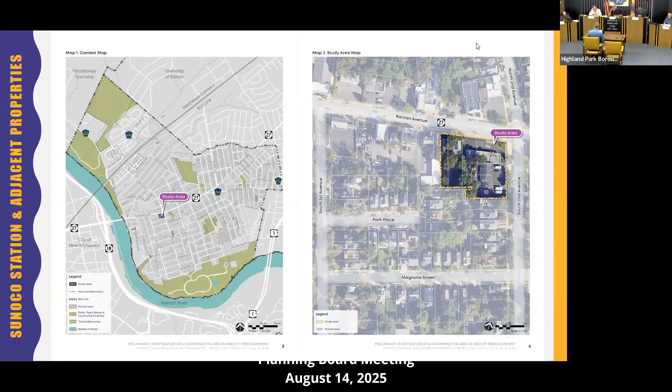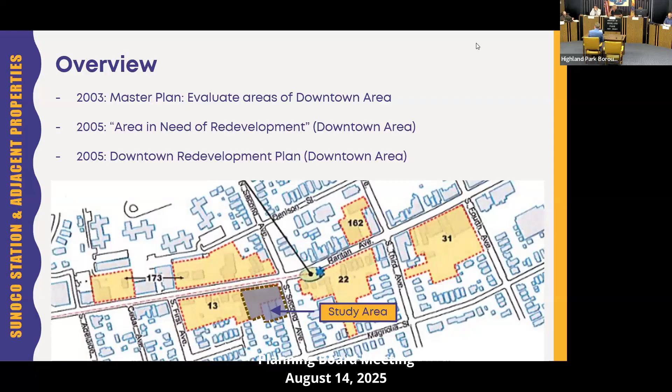Beginning in 2009, there was a mixed-use project contemplated for those two residential structures at 130 and 134 Raritan Avenue. It received approval from this board, but they never pursued the project. Beginning in 2012, there was an application for a 7-Eleven that, after about 10 meetings, was eventually denied. My colleague Jim Constantine represented the objectors, and that's sort of what brought us here to this community.

In 2017, a larger mixed-use building was considered for the same properties - going back to 130, 134 Raritan for the 7-Eleven and the Sunoco station - along with the concept of off-site parking. The reason was we shouldn't rely on Park Place since residential homes front that line, and we didn't want all that traffic going through. So the idea centered on tract D.

It has some centralized parking, but there are ways other tracks could have their own parking. As you know, the past few years, tract A and tract C have been proceeding in their own direction, while tract B has not, for several reasons. That concept of a larger mixed-use building on what we're calling tract B was considered.

After we did the area study for the gun and boat, a year later we did the redevelopment plan for tracts A through D, centered on the concept of centralized parking, perhaps a plaza on North Third, which became South Third after public comment. Tract B was folded into the application because they already had a developer ready to go, whereas everything else is more or less borough-owned and we're trying to get RFPs and get interest. We'd like to get downtown moving.

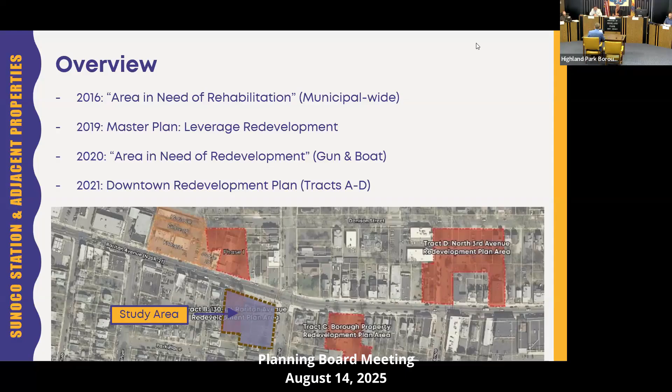So overall: there have been multiple applications, at least 3, for several properties within this study, but they've never been pursued or even approved. All these properties have had extended vacancies over the years, which I'll describe later. There's been progress at tracts A and C, but tract B hasn't been able to figure out the off-site parking. We're not going to let them proceed, by virtue of a redevelopment agreement, until they figure that out. But it's been years.

And I think the community, including this board, members of council, members of the public, ourselves included, asked, there's been a lack of progress in Sunoco. Why not focus on Sunoco? What's the deal with that?

So we hear you. Mayor and council authorized planning board to conduct this study, and as required by the local redevelopment housing law, in that resolution to authorize the study, you have to declare whether or not you may use eminent domain. Since 2013, the state requires that when you do your resolution, if you're not going to use eminent domain, you call it non-condemnation area need redevelopment. If you may use it, you have to say up front, you may use it. We're going to call it condemnation area need redevelopment. That does not mean the borough is required to or has to. It's just that they may.

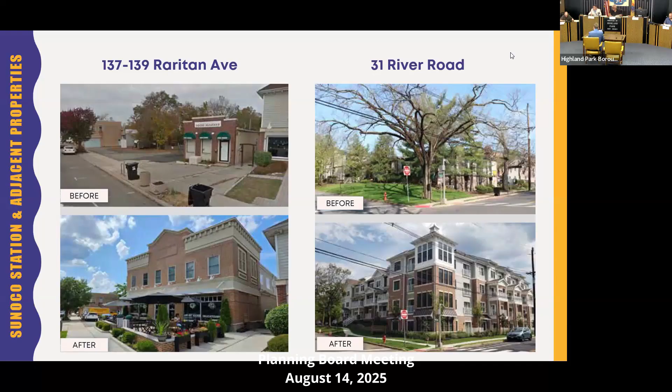And of course, you could designate a specific redeveloper to do a project. It could just be the landowner, and define their obligations, which could include contributions and community benefits. Redevelopment has obviously been successfully used throughout the state, including in Highland Park. These are just two examples I use often, and I think they're very well done. I'm proud that ever since 2016 we came in, we're seeing these happen, and it's slowly but surely coming along and really coming into place.

The statute requires a very specific procedural sequence, and we're just in the beginning of that step, even though there's been other planning related to Tract B, the 2005 plan, and so on. But what we really are is in the middle of that effort, where we prepare the report, hold a public meeting, you're supposed to hear what I have to say in terms of why I think the property does or does not meet the criteria for redevelopment. You hear comments from the public, any objectors, and so on. Your role is to decide, whether you agree or disagree with the report, whether the property does or does not meet the area of redevelopment, and then make recommendations by resolution to the governing body.

In terms of the redevelopment statute, there are 8 criteria. Just briefly, A is about substandard living conditions or working conditions. B is abandoned properties for at least 2 years, recently amended a few years ago to clarify 2 consecutive years. C is public or unimproved vacant land for 10 years or more. D is faulty arrangement of design. E is ownership and title issues, not just that there's inefficiency or not fully productive, but as a result of ownership and title issues.

F is really about 5 years of damage from fire and natural disasters. G is urban enterprise zones, which does not apply to this park, and smart growth consistency.

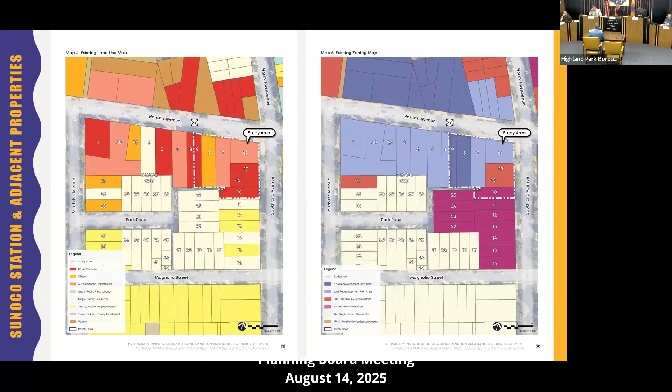On the right side, you'll see that the study area is subject to four different zoning designations, two of which are redevelopment plans. So it's a mixed bag in terms of land use as well as zoning, which is not ideal for redeveloping because you have to reconcile all that.

So now the fun part. This is the actual evaluation as to whether or not I believe the four properties meet the criteria. You'll see at the end of the report that it's my opinion that all four do meet at least one of the criteria. So I'm going to go through a high level of why I think each one of them are.

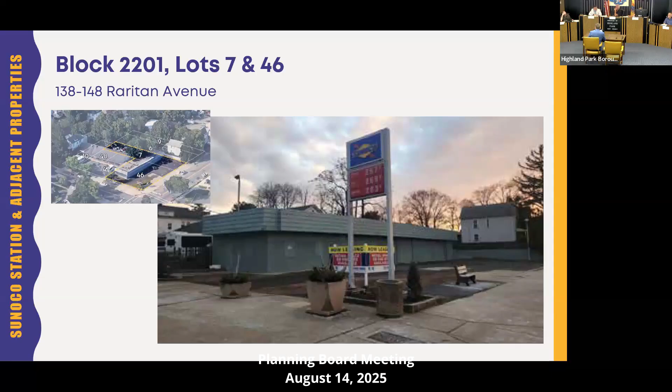We're going to start with Sunoco Station, block 2201, lots 7 and 46. The previous findings - it actually was already designated as an area in need of redevelopment 20 years ago, and then it was put into the 2005 redevelopment plan. It was used as a gas station since before World War II.

The current building with additions was built in 1954, with additions over the years. There's been no permit since 2011, which was a demolition permit. The gas station's been closed for almost 16 years, if not more. As we discussed before, in 2012 - can't believe it's already that long ago - there was consideration from 7-Eleven, but that was denied. There's been multiple calls for criminal mischief related to spray painting. Otherwise, not much happening there because it's been vacant for 16 years.

With regard to environmental contamination, get ready for this. I just want to give a high level. The first report of contamination occurred in January 1990 and it still remains contaminated to this day. So that's 35-plus years of contamination.

It started in 1990 when PSE&G noticed there was gas sitting in a manhole in the street, and I believe the plume was identified to affect the street as well as the property in question. In 1992, a small waste oil UST was removed. They found impacted soils, but the geologist at the time said no harm, no foul, no further action.

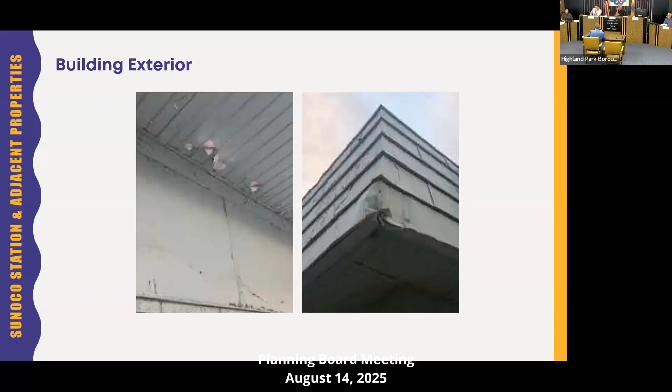What we found with the exterior of the building is really poor condition: peeling paint, some water damage, and it actually looks like vehicles damaged the building as well. We found water damage on the outside, water staining on a block wall. Obviously the building's all boarded up, but when we went inside, we noticed some doors and windows were broken, and the glass was on the ground inside the building.

On the interior it's also poor condition: water staining, water damage on the floors and walls, and some wood rot where there was wood, since it's mostly a block building. We found that the water was still running and leaking.

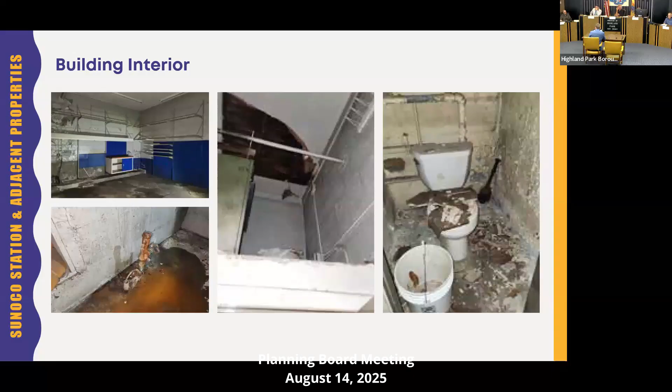And then elsewhere in the building, the ceilings - plural - above the toilet room, I'll call it, there's no sink and no finish materials, had collapsed onto the toilet.

This is a shed behind the gas station. This was actually a shed that was built in 1993. It went to the zoning board of adjustment for a site plan. This shed was built really for the groundwater remediation effort - they had a water stripping tower, a holding tank, and some other equipment to deal with the groundwater remediation project. This was ongoing for about 8 years, 1994 to 2001, after its construction in 1993.

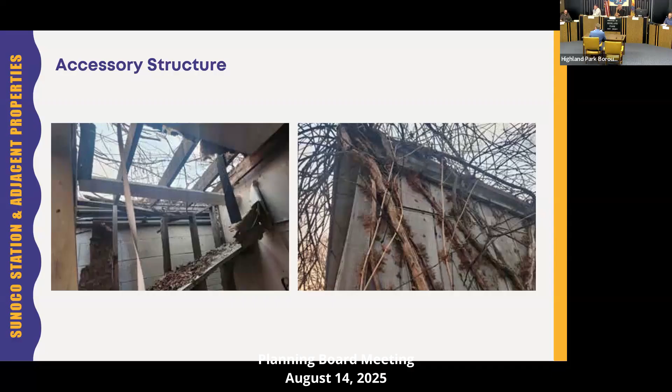Obviously this accessory structure, we call it a shed, is in severe disrepair. The roof's caved in, open to the elements, and there's plant growth going inside the building, and there was some insulation debris and whatnot all over the ground.

The rear yard was all paved at one point, but debris is growing through. There's some leftover tires, presumably from 16 years ago, still there - that's a concern for mosquito breeding. And there's an abandoned vehicle that's stripped for parts.

The parking lot in general is non-conforming with zoning. It's in the front of the building - we do not allow that downtown. It's not conforming to the zoning, the redevelopment plan, as well as just general best practices in the downtown area. As we identified in the master plan, the community said this is a large gap.

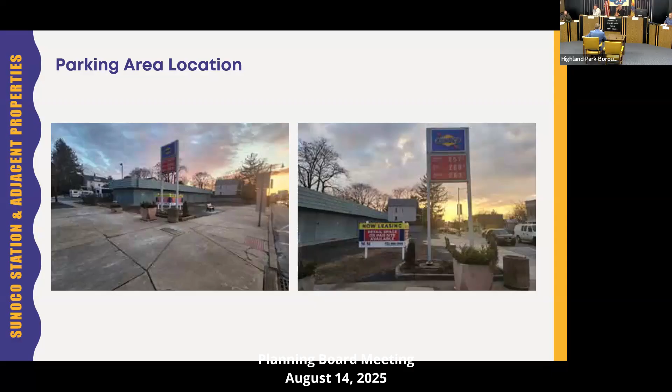They used the word 'gap' in the streetscape - a huge gap, 150 feet of nothing but asphalt and oversized driveway aprons. Obviously this impacts aesthetics and discourages pedestrian activity and economic vitality, which is detrimental to the welfare of the community. With regards to the actual layout and design, there's very little definition to this parking lot - it's simply just a mass of pavement.

There's no defined parking spaces, no drive aisles. Users could just do whatever they want and then spin around if they were to trespass on the site, which creates dangerous conditions for people walking on the site.

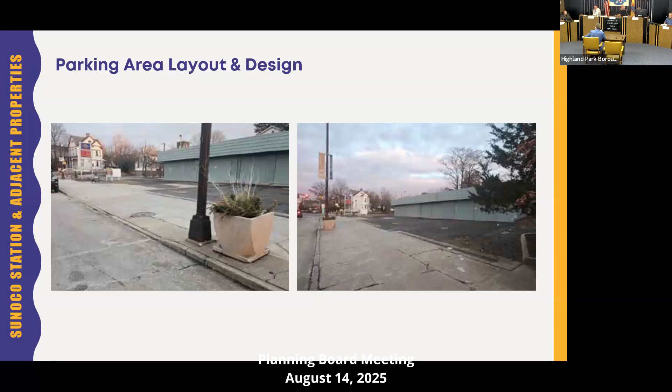As to the accessible parking spaces, it's required to be 16 feet wide, van accessible. This does not meet that, and obviously the conditions are such that it's not accessible to get to the building - it's undersized and the pavement is in disrepair. Simply, it's not accessible. In terms of landscape buffers, there's really no buffer between the building and the retaining wall.

Imagine walking through that parking lot, just like with the Classic Cleaners property and other properties we studied. This condition is dangerous because motorists can go in and out of the parking lot without any protection, and the pedestrian has no protection whatsoever.

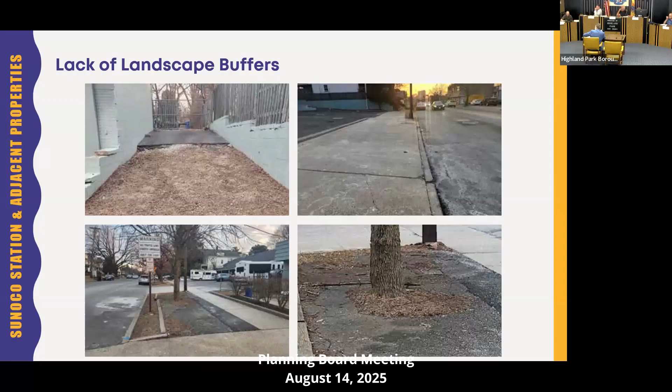So this all just exacerbates the heat island effect. That tree won't grow any further - in fact, it'll probably die if not already. This shows that there's excessive pavement, and the condition will make the heat island effect even worse over time, which will negatively affect all the neighboring properties as well. The oversized curbs...

So there's not one, not two, not three, but there's 4 driveways for this property. Along Raritan Avenue, there's 3 of them, and they range from 22 to 38 feet, but a typical driveway is 12 to 18 feet one way, 20 to 24 feet two way.

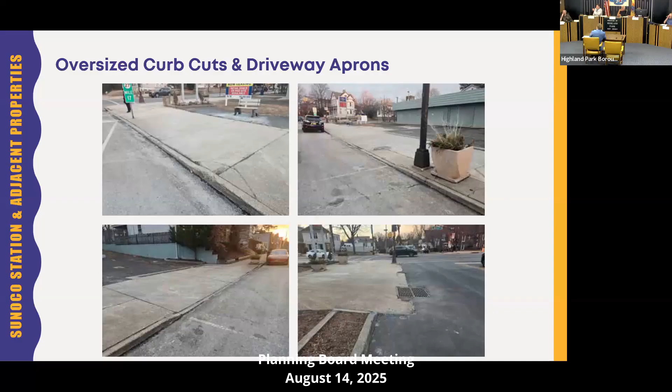The driveways occupy nearly 2/3 of the frontage, and the raised curb between those driveways is less than 6 inches, so it's very shallow, giving it the appearance of one giant 150-foot wide driveway, obviously extremely dangerous to the public. And on South Second, on the right side, the apron is simply not done correctly. It's a monolithic pour and it's jutting into the street.

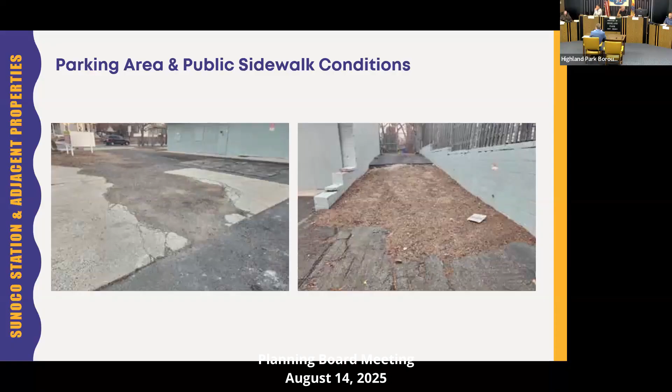So the conditions of the property are generally in poor condition. It's really indicative of the long-term vacancy of the property. These conditions - deterioration, various depressions, settlement, missing pavement altogether - will contribute to ponding, freeze-thaw, slip hazards in winter, mosquitoes in summer, and obviously pests.

In terms of land coverage, we discussed this already at length. There's excessive land coverage. If this lot was to be repaved in the front, there would not be sufficient space to construct a conforming parking lot. There's simply not enough depth, 18, 24 in a walkway - simply not enough space to put a conforming parking lot.

And the rear parking lot was intended for storage, so it really can't be reused as rear parking for a public facility because it was designed for tandem parking of cars for storage or awaiting repair. If this became a new store, you won't get 16 parking spaces back there - you're going to get maybe 6. So it's an inefficient use of land and a high degree of excessive pavement relative to the number of parking spaces that could be provided legally.

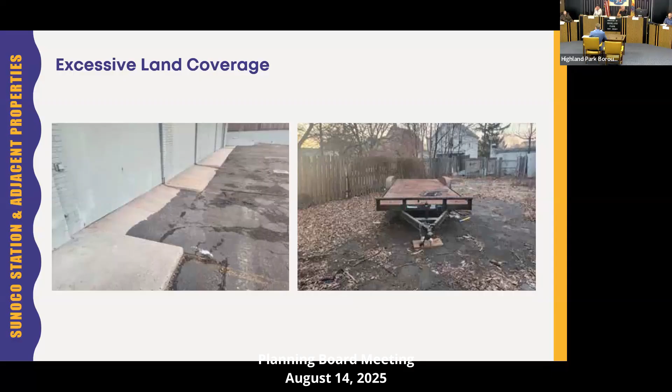So it simply shows that the lack of landscape islands and the lack of street trees and shade trees means that this all contributes negatively to the heat island effect.

In terms of obsolescence, I did a little bit of narrative on that - generally speaking, there's always going to be a need for gasoline service stations, no matter how hard we push for EV. There's always going to still be a need for gasoline service stations. And service stations really evolved over the years since their inception.

It really began, like at this location, as a small roadside stop. Over the years, it's evolved to do tire changes and services, and even larger, like the giant Wawas or Buc-ee's, if you've been to one, like in Florence, South Carolina. So it's definitely transformed over the years.

But in small downtowns like Highland Park, they can still be relevant if they have space for a store and other EV parking or EV charging stations, but that's not possible here because of the issues I raised before - there's not enough room to put a conforming parking lot. They're kind of stuck. The 7-Eleven application actually alluded to the fact that, well, in order to even keep it a gas station, it needed to be redeveloped. So I think that says a lot about that particular application.

So in the end, what this suggests is that these conditions do not lend themselves to be used as a gas station today. It just means that it's no longer useful today in its current condition and is functionally obsolete. So in summary, the substandard conditions in the building are conducive to unwholesome working conditions - hits A. It's been vacant for more than 2 years - it's 16, hits B. And obviously the obsolescence, faulty arrangement of design, hits D. So for those 3 criteria, I found 3 criteria that the board could rely on to suggest that the Sunoco station meets the criteria for redevelopment area.

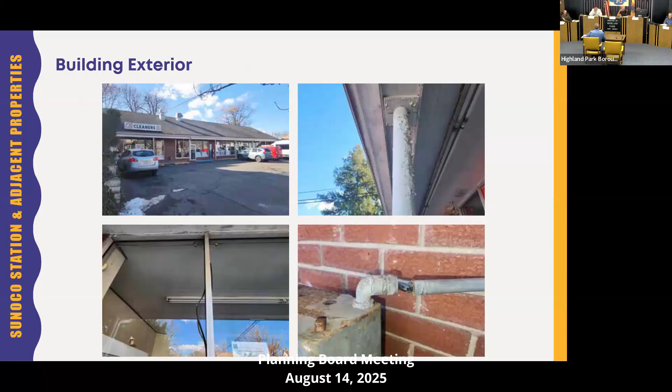In terms of the actual site inspections, the exterior is generally in fair to poor condition. There's some chipping paint, exposed wiring, and sealant and caulking missing from the windows, so the building's not airtight or waterproof, and water infiltrates into the building. On the outside, there are some missing downspouts, and trash and debris everywhere.

I didn't have the photo, but someone actually came into Borough Hall a week or two ago with a photo of an overflowing trash can, and I was going, yep, just give me a couple weeks and I'll show it to you. I didn't put the photo in, but nothing's changed, the trash is everywhere in the front of the building.

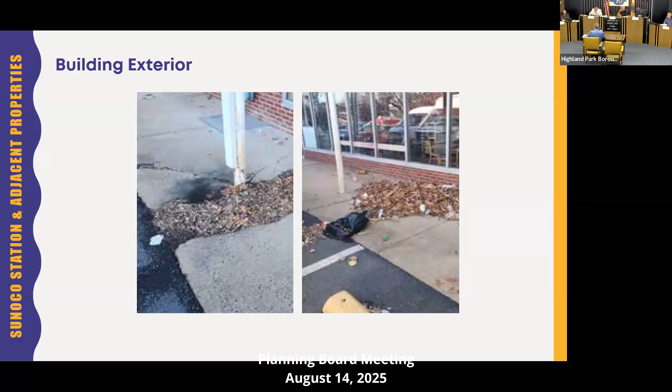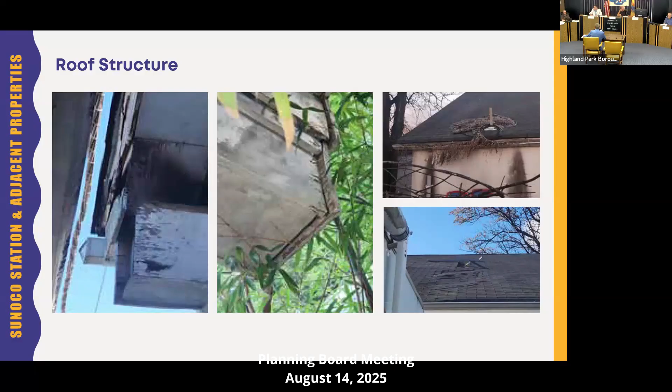In terms of the building, the roof structure and the eaves at the ends of the property are exhibiting wood rot, so water infiltration is getting into the building, and obviously it's subject to pests. There's also a large depression on the roof structure, which suggests there might be water damage inside the building.

Inside the building itself, starting with B-B-Big, it looked like the building was completely abandoned. There's still some food out there, some water in storage, and obviously expired goods.

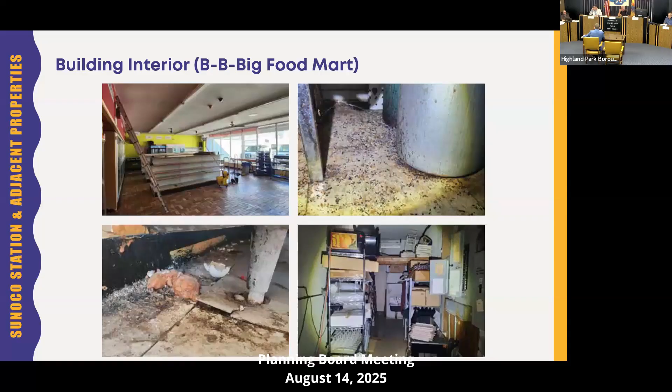Also in the kitchen area, there's some food waste still there, probably from 7 years ago and still there. There's deterioration throughout, water damage, and so on. There's water infiltration in the refrigeration area, and some open pipes in the mechanical room.

In Al's Cleaners, Al's Professional Cleaner, I think it's cleaning, that's my fault, there's some water infiltration underneath the equipment, missing tiles, and just unfinished conditions.

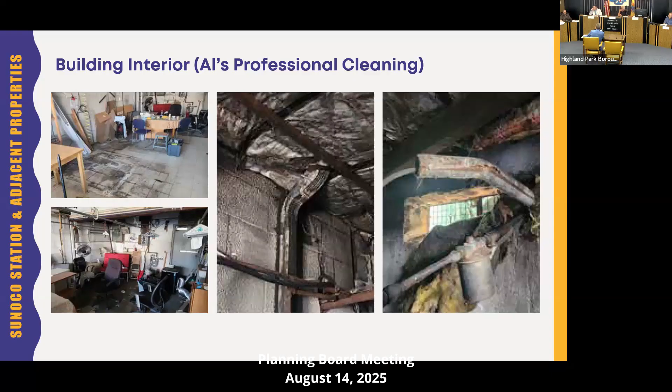On the other side of the building, the right side, you'll see corroded rust everywhere, insulation falling, and the door that's supposed to be secure is open to the elements. I just walked right in with no key, I was given permission to trespass.

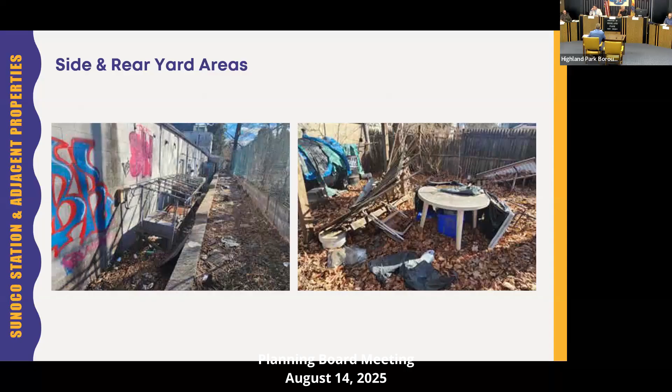At the side and rear of the building, this is simply a fire hazard, trash and debris everywhere.

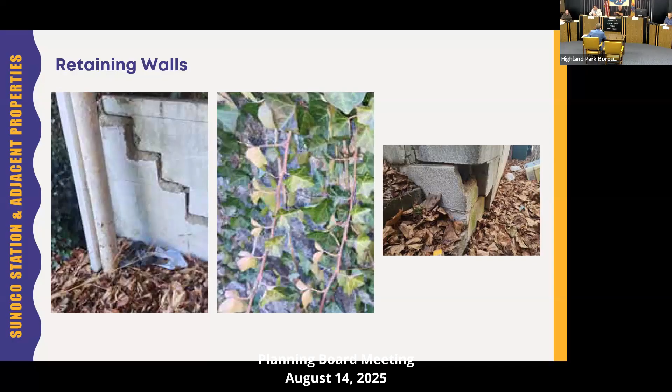There's at least 3 retaining walls on the property. Similar to the Sunoco station, this has a non-conforming parking area at the front of the building. It actually has the proper depth, but it still lacks buffers between the parking area and the sidewalk. What makes this worse in this case is that the parking lot is pretty much squared off.

So you have parking spaces all the way to the end of the property, which means when they try to back out, they have to use more distance and maneuverability, doing almost a full K-turn to exit. But when they do that haphazard turn, they're more than likely to go into the public sidewalk and risk a pedestrian strike. Obviously that hasn't been an issue lately because, again, it's been vacant for 7 years and appears to be used as parking for the Reformed Church.

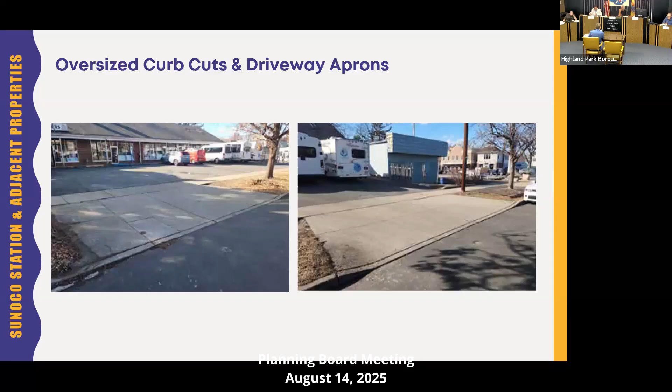Again, we have oversized curb cuts, about 25 feet wide, generally oversized. Taken together, they occupy nearly half of the frontage of the property. This is an inefficient use of land and design, which contributes to long walking distances, which is dangerous for pedestrians, and the illogical driving movements just make matters worse.

In terms of conditions, it's in fair condition. The parking lot looked like it was repaved only a few years ago, but it's already showing signs of deterioration, depression, settlement, ponding, et cetera, same conditions as the Sunoco station. There's no stormwater management, so water simply sheet flows onto the public sidewalk, and there's a lot of pavement without opportunities for infiltration.

So in summary, we already talked about vacancy, that automatically hits criterion B. In terms of analysis, in my opinion, the building has substandard working conditions, unwholesome working conditions, and there's faulty arrangement design and other deteriorating conditions. So it meets A, B, and D.

Now moving on to one of the houses, this is 134 Raritan Avenue, lot number 6, block 2201.

Already, it hits criteria B because it's a commercial use. What we found through the records: broken water pipes, missed tax payments and liens, eventually redeemed and settled. But there's been a pattern of missed tax payments and liens, as well as conditions on the property conducive to unwholesome working conditions.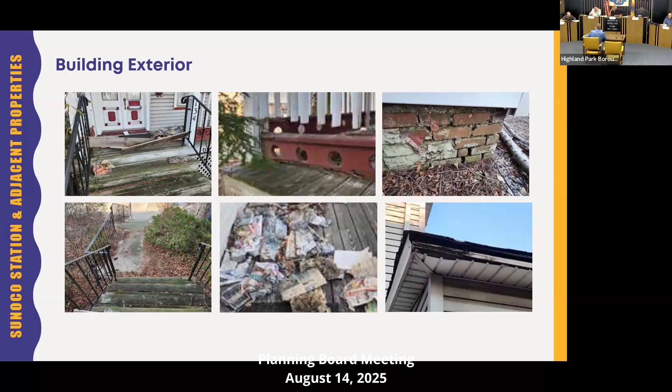At the back of the building, this is supposed to be a rear porch. Now you see the roof caved in, and there's trash and debris everywhere. It might be better if I had a video of this, because there was trash everywhere, as well as building materials.

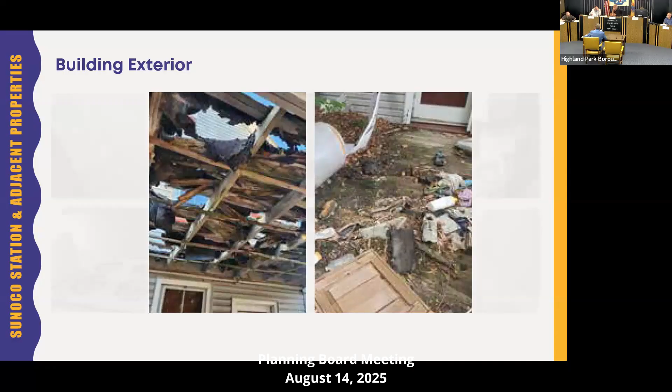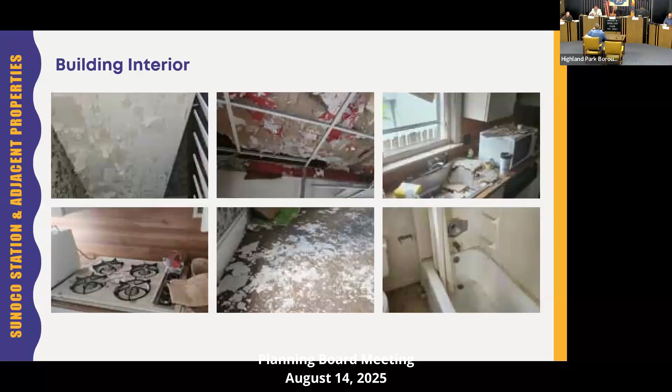Inside the building, this is both the first and second floors. This is office space, but it still looks like a house. There's peeling paint everywhere, on the ceiling, walls, and floor. Ceiling tiles caved in the kitchen, damage all over the kitchen, and the tub in the bathroom upstairs shows some deterioration, which suggests there might be water infiltration.

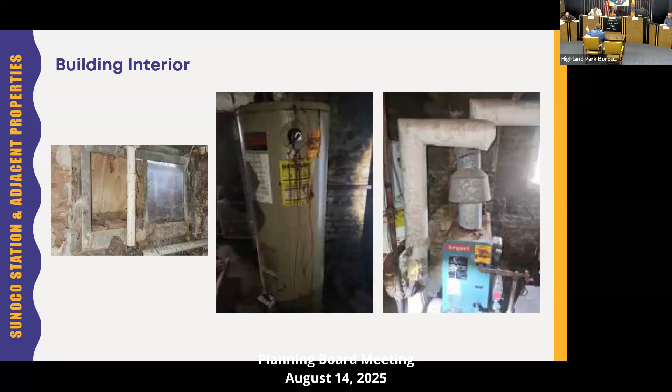In the basement, the basement windows weren't secure. They're boarded up, but you could push them open pretty easily. The water heater and equipment were abandoned, and regarding the furnace, according to the construction code official, I was touching that pipe and he said, 'Don't do that, that's asbestos.' Okay, so I won't do that.

The front, side, and rear yards are generally in disrepair, with overgrown vegetation. The wood railing blocks are in disrepair, so the railing is kind of loose, and when I grabbed it to go upstairs, I almost fell. The backyard is actually paved, but everything has grown through it over the years, and there's an abandoned vehicle. I believe someone passed away, and the vehicle is still there.

In terms of the faulty arrangement design, this was actually raised in the 2005 report, so I'm reiterating it but going into a bit more detail about why it's a faulty arrangement design. In the 2005 study, there were a number of conditions we just discussed, from the steep slopes to the high first floor, that are not conducive to commercial development in its current form. This generally means it cannot positively contribute to the downtown area due to the lack of buffers and the condition of the grade change.

Reactivating commercial use will actually create a strain on the community, because there's really limited access to the rear, both in terms of access and parking. There actually is no space to park or design a conforming parking lot on this lot alone, and access would go through Park Place, which will negatively impact the residents who live on that street as well as in the neighborhood.

And you'll see, I'll incorporate by reference the same argument I'm making for this next lot, the last lot, lot number 6 next door. Sorry, the prior lot's 130, right? This is 134, right? I got my address wrong. This is the summary of the house we just did, 134 Raritan.

So as I indicated, the property has substandard conditions conducive to unwholesome working conditions. Criteria A, vacant for more than 2 years. Criteria B, pretty easy: faulty arrangement design, obsolete layout, detrimental to community. Now, section 3 criteria mentioned before, this is actually similar to the classic cleaners argument.

This is the hole in the donut because, as you know, with tract B, lot 6 needs lot 9 in order to be redeveloped. And the same argument can be made for that property as well. Lot 9 needs lot 6 to redevelop by virtue of that redevelopment plan. Plus, it also is a hole in the donut of the 2005 redevelopment plan, and likely the hole in the donut if we were to pursue a different redevelopment plan that considers this study area as a new project.

So in multiple ways, this meets the criteria with the intent and purpose of section 3 criteria. Also, this was raised at the last meeting too. They say, oh, well, if you said section 3, that means I'm not saying it meets A, B, D. That's not the point I'm trying to make. I want to make it clear on the record that it meets A, B, and D. But if for some reason you disagreed, you can rely on section 3.

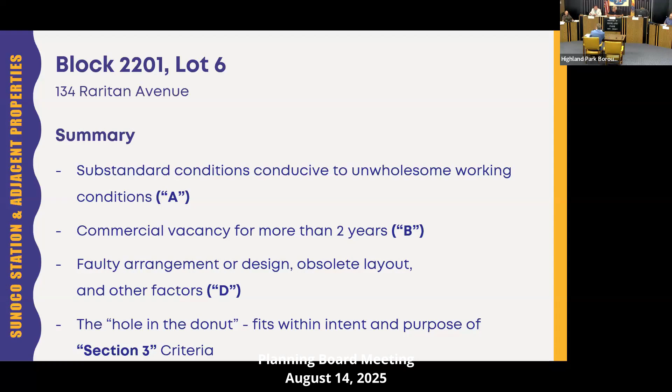This is the last property, the house next door, next to the Mary restaurant. Again, this property was designated area in need of redevelopment in 2005, and as part of their 2005 redevelopment plan, it again is part of tract B at the 2021 and amended 2024 redevelopment plan. And similar comments as the other property, lot with the other lot taken together, concepts were considered in 2009 and 2017 for mixed-use buildings, and again did not pursue and were unable to secure off-site parking.

This building was last used as a commercial space with an apartment above it. That's important because the criteria B section refers to only commercial spaces, has no indication in the statute that I can include a mixed use property or one that includes residential. Because there is residential use here, we cannot use criteria B. Just want to make that clear.

There's been some calls for theft and burglary. Again, another burst water pipe. Actually, this is recent, I actually had to call DPW because the water department called, so we assisted on that. And there's a regular pattern of missed payments and tax liens, but they've been redeemed with the new property owner a few years ago. And the property was vacant and registered as vacant property in 2025.

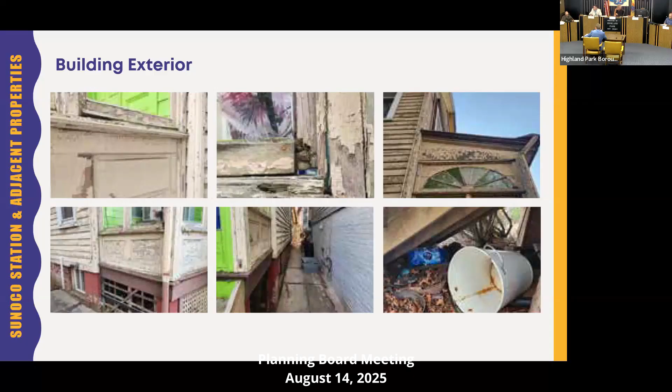Another reason why we can't use criteria B, because in that statute, it has to be at least 2 consecutive years. Building exterior, similar to the other property, poor condition, lack of maintenance, which is really indicative of the long-term vacancies. The chipping paint, water damage, wood rot, just missing elements altogether, trash and debris under the porch, as well as blocked access to the 2 units. There's a downstairs unit, well, really it's the upper ground floor unit, and there's a second floor unit.

In the back of the property, there's this, I guess you can call it a porch. There's some sheathing on the side, and it's completely rotted away. It's peeling away, there's mold, the railings are broken, and the roof is damaged. Again, there's trash and debris blocking access to the back door.

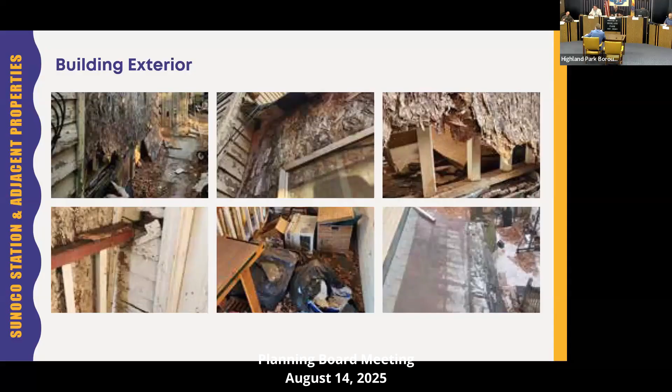When I look through the second floor window, there's no shingles, and at the time it was snowing, so there's ponding of water on the roof. On the lower levels, that's a basement window. It's not fixed at all, so I pushed it and it swung around like a carousel.

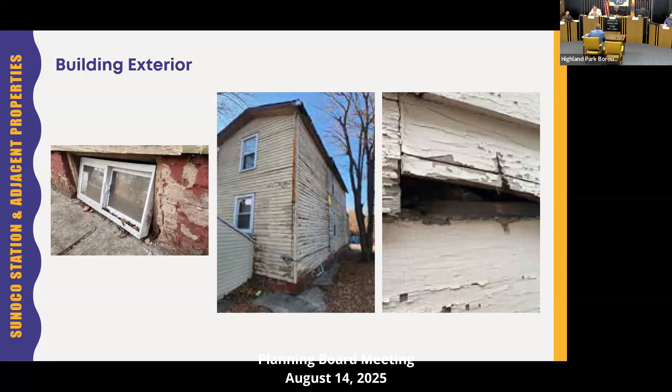The rest of the building, the siding is in complete disrepair, wood rot and water infiltration. It's my understanding, though I don't believe I put this in the report, that the property owner said one of these two properties had squatters, and you saw there was easy access just by pushing the window open. So frankly, I'm not surprised. But when I did my inspection with Mr. Brescher, we did not see any squatters.

On the inside of the building, there is apparently a water leak which still hasn't been addressed, and the damage from it hasn't been addressed either. The floor is warped, and the ceiling tiles crashed into a residential refrigerator and a triple compartment sink. Again, this is a commercial space that kind of looks like a quasi home office. It's the strangest space I've been in.

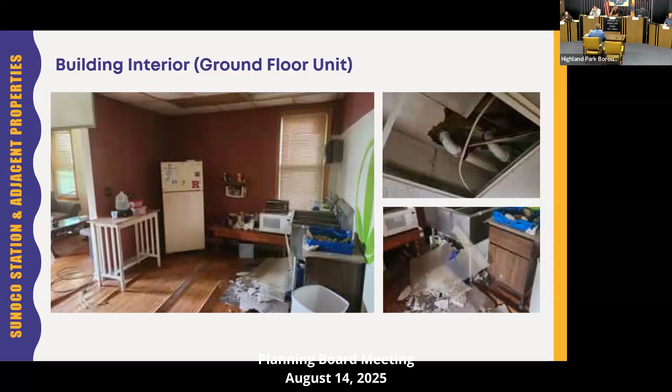On the second floor unit, there was mold pretty much everywhere. Pretty disgusting. I might have lost a few years of my life in that building.

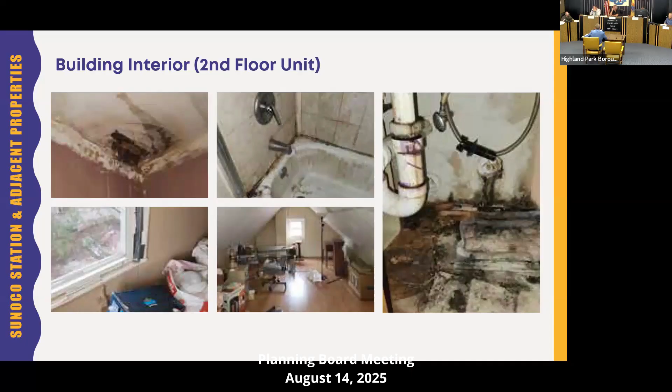In the basement, there's again more mold and water infiltration, basement trash, and it looked like it had been abandoned. The top right was interesting, that's a toilet in the middle of the room. So if you want a toilet in a room open like that, you've got one there. I think the bathroom was probably built to code, but the room probably not. Plus, it's also not clear whose space that is.

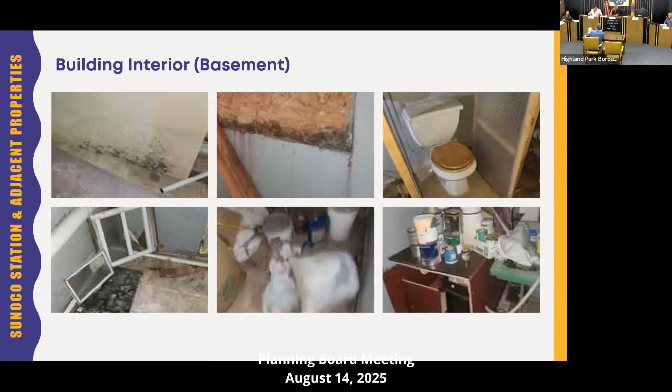The first floor is its own key unit, the second floor is its own key unit, two different tenancies. It's not clear how the basement is utilized in that regard.

The front yard is actually not as bad as the other property, but the stone stairway is in disrepair, on an angle, with chipping paint. When I first did my inspection, it was snowing and sleeting, and I slipped and fell down the stairs. Still smarting on that.

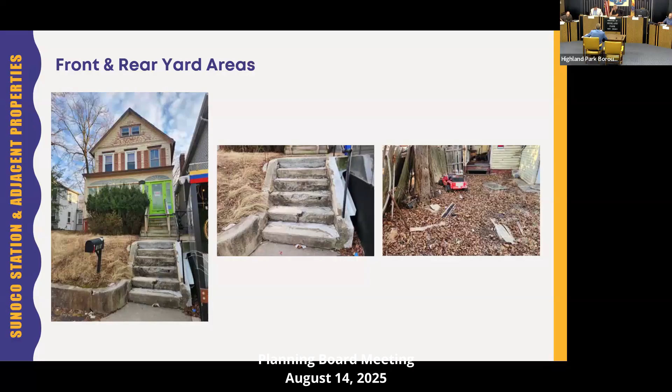The rear yard area was supposed to be paved, but you can't tell anymore because it's leaves and debris everywhere. And the same argument applies about faulty design.

This property cannot be reactivated on its own as a commercial use because it's simply too narrow. You can't put a conforming parking lot in the back. You'd have to access from the rear, which would negatively impact the neighbors on Park Place and neighboring streets. And to put a parking lot driveway from Raritan into the lot would mean demolishing the building. So it's not possible to reactivate the commercial use. Again, it would be better as a home, but it's not permitted.

So the summary here is similar to the other house, except for criteria B. I find that this has substandard conditions leading to unwholesome working conditions as well as living conditions, though I did not put that on the slide. So that meets criteria A, faulty design, obviously in the layout and other factors.

For criteria D, again the same argument: Lot 9 needs Lot 6 to be developed. It's the hole in the donut with each other. So you can rely on Section 3 if for some reason you would disagree that criterion A or D apply.

That's the conclusion of the report. Four separate properties, they all meet at least two of the criteria, if not the Section 3 criteria. My recommendation is for the planning board to advise the mayor and council that this property does meet the criteria as a condemnation area in need of redevelopment. Any questions? Thank you for your report.

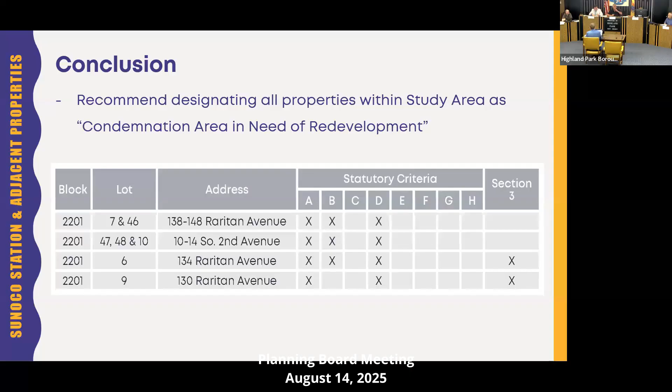For the last property, 130 Raritan, when was the last time this property was occupied by a tenant? I know it was registered as vacant in 2025, but prior to that, do we know when was the last time someone non-squatter was there?

That would be almost impossible to tell, so I'm just relying on records. I saw police reports about a resident who lived in the apartment observing an incident in the street within the past couple of years. But there's a gap in records, obviously. There's not much of anything on this property. All I have is that the property is vacant as of February 2025. That doesn't mean it's only been vacant for 6 months. It could be longer, but I can't assume it's 2 years or more.

Hey, Chris? I'm sorry. No, finish.

It is appalling, the condition of this property, and it is absolutely appalling to me that there would be people living in this property subject to these conditions and actually paying someone rent. I know this may not be the appropriate venue, but I feel I have to say this. As a borough, we have to do better by the residents that live here to make sure our neighbors are not living in these conditions, and that homes around a house like this are not subject to the effects of living next to a home in this condition. I can't understand how this could happen. I know that when a landlord leases an apartment to a tenant, they have to get a certificate of occupancy, and this isn't being followed up on. There's a record of new tenants who have to register the property for rent. So there should be checkpoints to make sure these things are in place, and landlords should be fined for this. This is abhorrent. No one should be living like this.